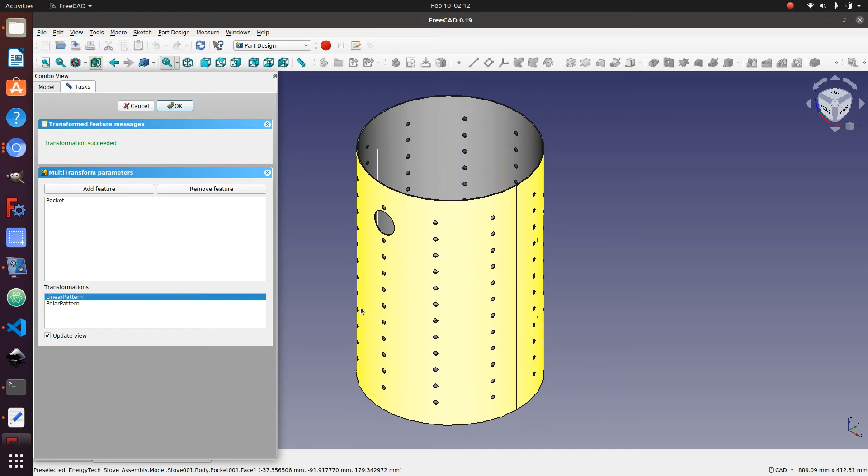And then I did a multi-transform, both a linear and a polar pattern, to cut the holes this way. And then I did one final pocket at the end. And of course I shouldn't have hit that because now it has to recalculate, and that will take some time. So, okay, that is the inside.

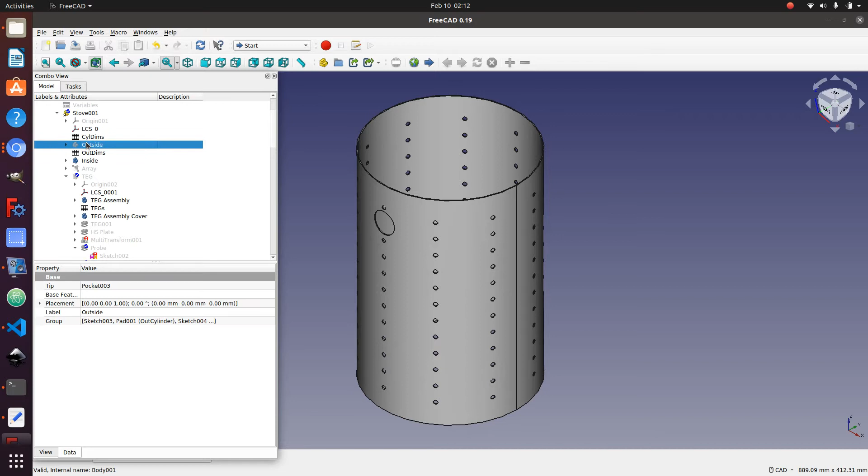The next thing I built was what I would call the outside. Just one minute here. So I'm going to just show the outside. I built the outside next, and I used similar things, essentially mostly pads and pockets.

There was nothing really all that interesting here other than the bottom, which was a sweep I believe. So it was a sketch like this, and then it was a rotated sweep here. Yeah, and that was done using the part design, a revolve.

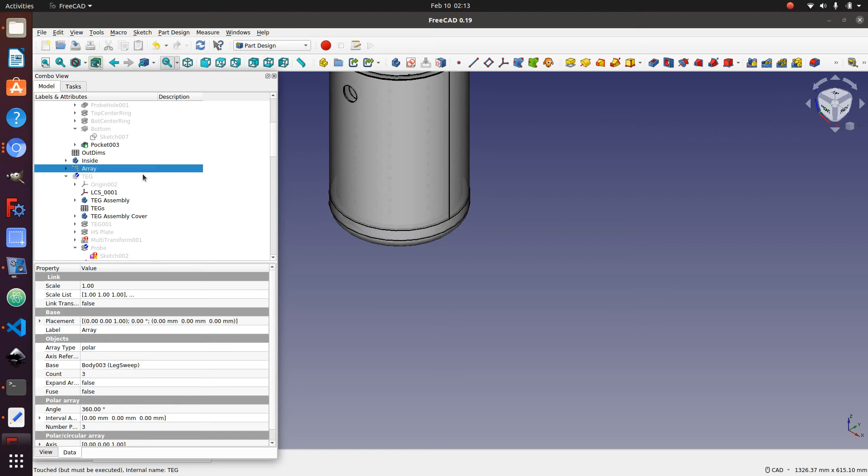Then after that, what I did is I built the legs, and I did that using an array. I built one leg at a time, or I built the one leg first, and so I used a sweep for that. So a revolve for the last one, a sweep for that.

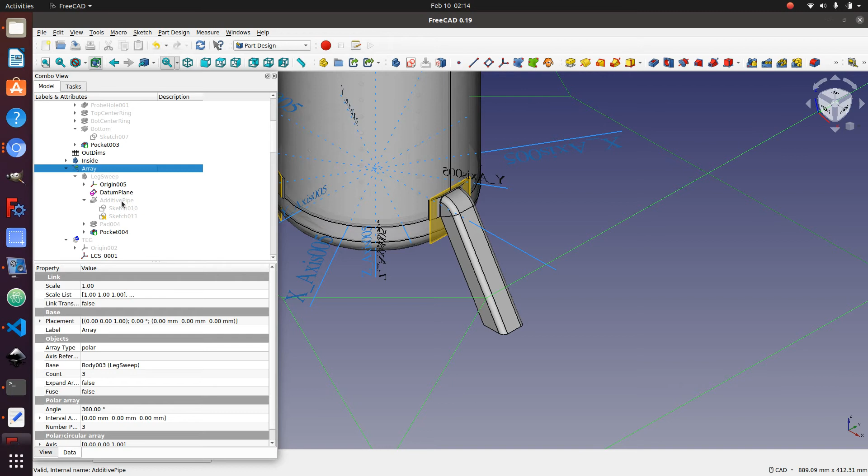I drew the cross section here, and then I added a datum plane. I drew a cross section, and then there's the cross section, and then I drew a path, and then I swept that and added the thing.

And then lastly I did a linear or a circular array using the draft tool to essentially revolve this around the z-axis to make 3 legs.

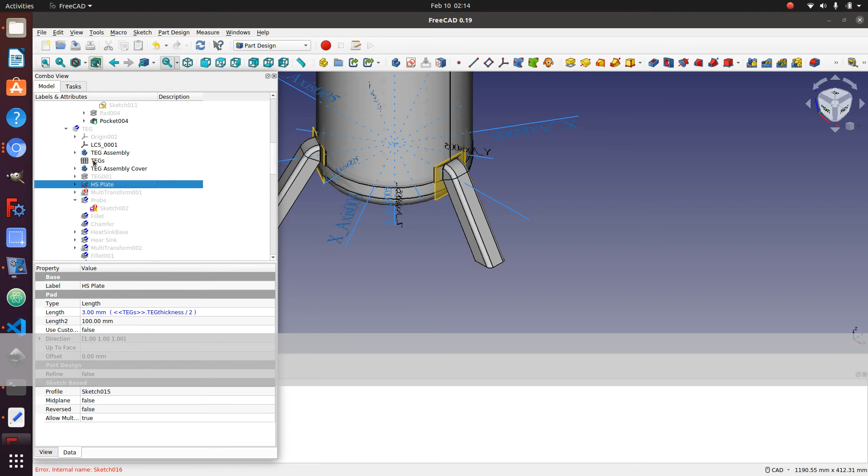And then the last thing I made was the thermoelectric generator plate. So that's all one assembly. Of course it's not showing, but just hold on, I will hide the...

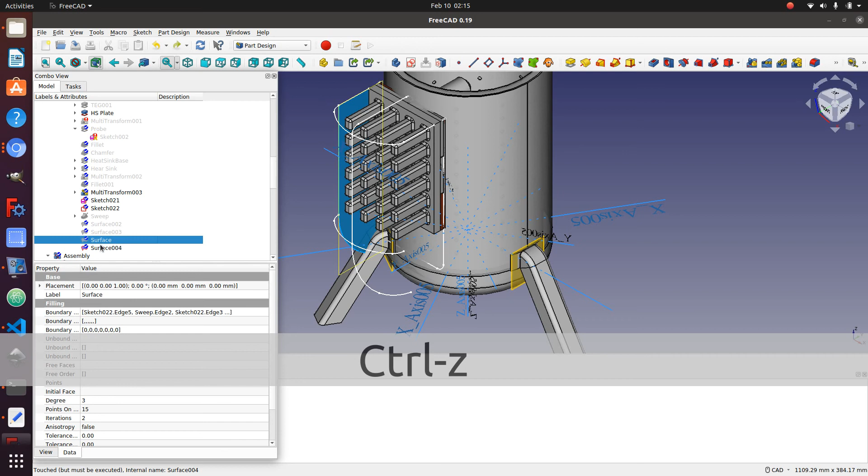I will hide the sweep here. So I'll hide these surfaces so that you can see - essentially what I did is I started with one thermoelectric generator.

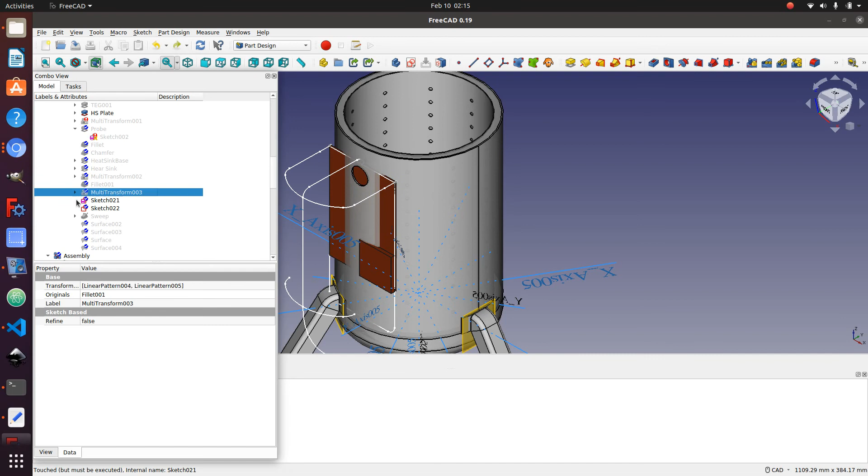So there's one thermoelectric generator with a plate, and then I did a multi-transform in this direction and in that direction. And then I built the heatsink, and then I did all of these also with a multi-transform on the fillet

and the thing. And then I used the surface tools, so I did a sweep to make this first surface using this cross section and then that profile. And then I used the surface tool to build out all of these surfaces.

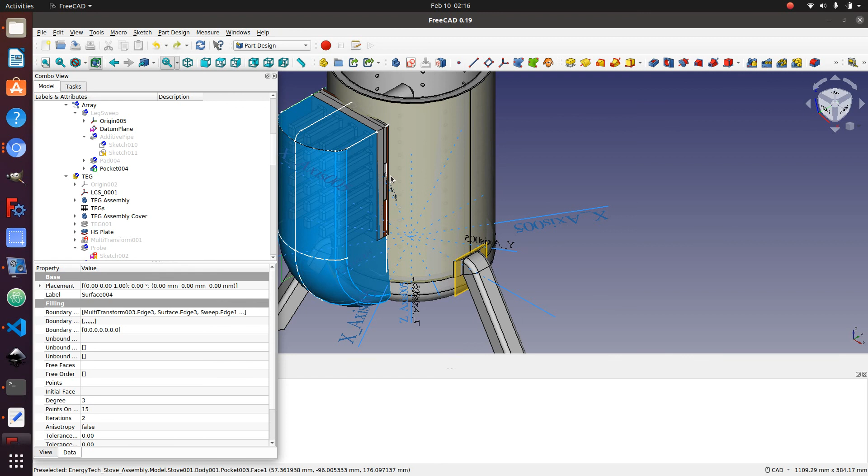And this was done using 2 projects, which were then merged and then put into this final assembly here.

So there you go. That's everything that went into making this. Hope you enjoyed.